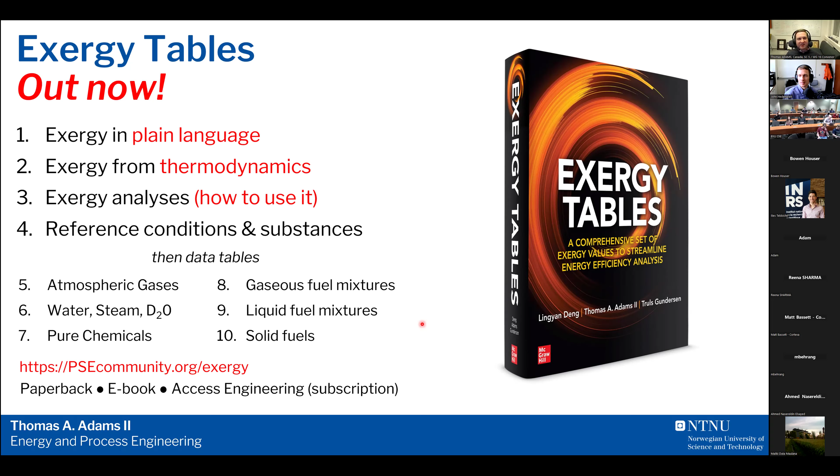And then you're off to the races. Okay, so Exergy in a nutshell, for people that have never heard of it before, the best way I can describe it is it measures both quantity and quality of energy.

It's measured in joules or calories, just like other kinds of energy. But the quantity part is based on the first law of thermodynamics, and the quality part is based on the second law of thermodynamics. Exergy is kind of a marriage of the two.

Here's an example. Let's say I have water in an Olympic-sized swimming pool at 28°C. It has thermomechanical energy in the form of heat capacity, let's say between 28 and 25°C, or I can have 8.3 megawatt hours of electricity. Both of those have 30 gigajoules of energy, so they both have the same amount.

However, the Exergy content of that tepid water is just 0.15 gigajoules, but the Exergy content of electricity is 30 gigajoules, because electricity is basically pure Exergy. So they both have the same energy content, but clearly the quality of electricity is far beyond the quality of tepid water. So what can I do with my electricity?

Well, I can power a Canadian house for 6 months. I can drive an electric car 47,000 kilometers, which is unbelievable but true. Or I can heat up an Olympic-sized swimming pool by 3 degrees. I can do all of those things with 30 gigajoules of Exergy.

But what can I do with 30 gigajoules of energy in an Olympic swimming pool? Well, I can swim in it. So obviously this is more useful, and Exergy is that thermodynamic measure of that.

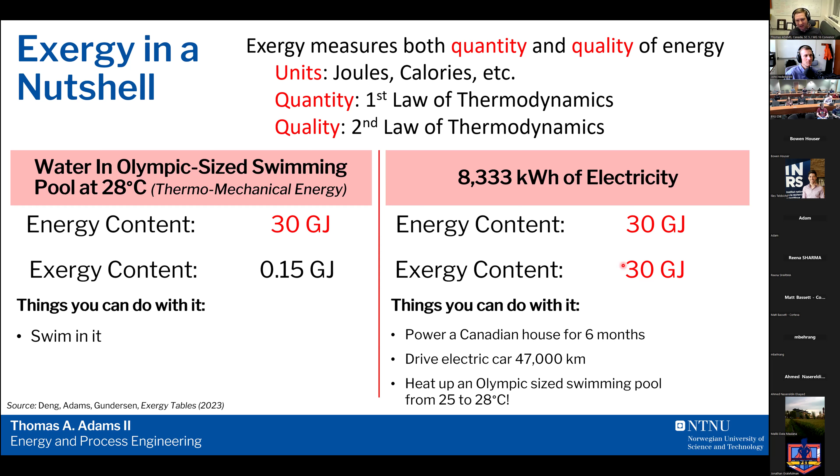We're trying to quantify that now with something that means something to us, and the point is for us as a systems engineer to use it for decision making and to understand and analyze. That's the point. There's actually a bit of an argument in the literature about the taxonomy, like different kinds of Exergy and how you break it down.

I don't want to get into too much detail, but we really focus on heat Exergy. This is very common, everyone kind of starts there. So our book talks about this.

And I want to make very clear, we're talking about Exergy of energy on Earth, because Exergy is relative to the environment. If 30 gigajoules of something is 30 gigajoules wherever it is, that's energy. But if it's Exergy, it depends on how it compares to the environment. So we have to be very specific - we mean the Earth. And we talk about substances and matter.

The two that I'm going to really talk about are thermomechanical Exergy, which comes from thermal energy, pressure-related energy, but it's a little bit more than that - it includes phase. And then the chemical Exergy, which is like the chemical bond energy, the potential there, but also concentration differences from the environment as well - so purity. These are all lumped together in these two forms, thermomechanical and chemical.

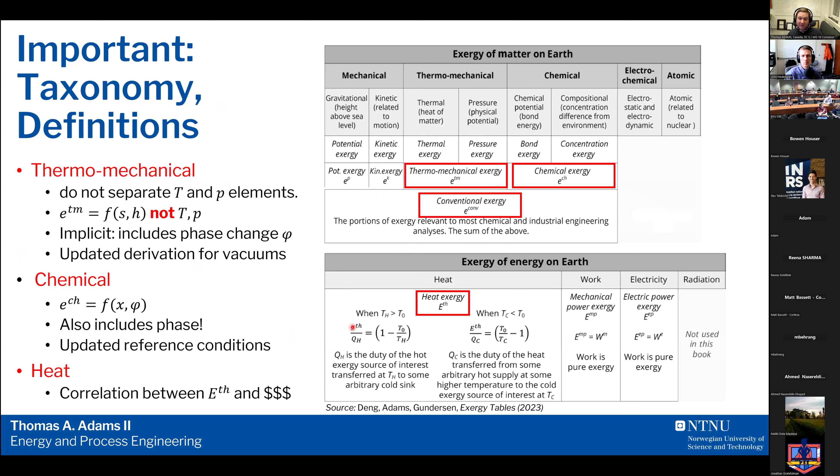We add them together and we get conventional. And we can add things like gravity and motion, but we're not going to talk about that today. So there's a big correlation here between these values of Exergy and monetary value, and we'll talk about that as well. So there's a very, very useful connection there.

Now, the definition of Exergy - this is already argued about. There's different sort of academic spheres based on what definition you work on. It's almost like a family - which family are you in? And this is important. I don't think people talk about the definition enough.

But the best definition I can find, that I think makes the most sense, is that Exergy is the maximum theoretical work obtainable from an overall system consisting of a system and the environment, as the system comes into equilibrium with the environment and then passes to the dead state. We're not going to talk about the dead state, but this is a very common working definition - it basically means I have something, a system, like a chemical I'm really concerned about substances, so like my chemical, and then I have my environment, and I can do work if I can bring my thing into equilibrium with the environment.

Okay, if I can bring it into equilibrium and do work in the process, then I'm producing work. And the max amount of work I can do is what we call the Exergy. I'm going to use TM because I'm going to talk about thermomechanical Exergy mostly today.

So all I did here was rewrite it as an optimization problem because I'm a PSE person, and a lot of people will understand this immediately when I express it this way. This is not common to write down, but it's what we mean in mathematical terms. I should be able to find a process P, that's my decision variable, that brings my system into equilibrium with the environment, and I should be able to do work during that. So whatever process solves the optimization problem, that maximum work is my Exergy. That's another way of looking at it.

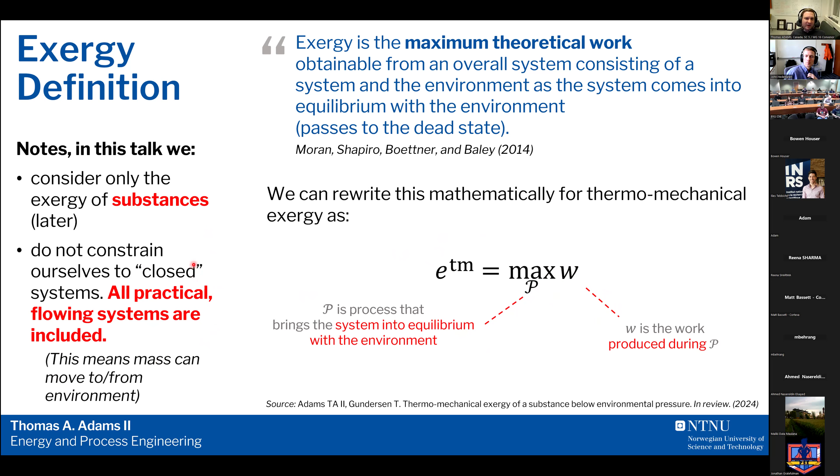Just for the sake of discussion, I'm not going to talk about this, but we're talking about open systems, so they're flowing - practical things chemical engineers care about. You can allow mass to exchange with the environment. That's just a caveat for the nature of the class of equations I'll talk about today. But we can understand this optimization problem, I think, and that's our perspective.

So that process P, you can exploit any difference between that and the environment. I should be able to exploit a temperature difference, a pressure difference, phase differences, concentration differences, chemical form like bonds. I can exploit height, momentum, all sorts of stuff. If it's different than the environment, I should be able to exploit it thermodynamically in some way.

For example, real simple, let's say I have something that's hot. One way I can exploit the heat of that thing is by building a heat engine, like a Carnot engine. Real classic thermodynamic result. I can use that heat if it's above my reference temperature, that's my environmental temperature, T0. And I should be able to use a perfectly reversible engine. I can produce work, and then I reject the remainder of the heat of the engine to my environment.

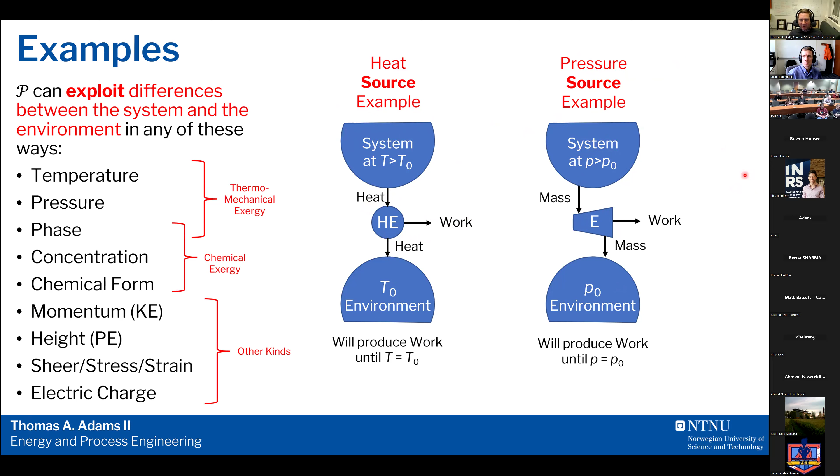I could do this until, if this is closed or something, I could just leave it until it finally cools to the environmental temperature. This is a very normal, simple thermodynamic result. Same thing for pressure: if I have something at high pressure, I can let it go directly into the environment through a turbine, producing work. These are very normal things that we do in engineering. So these both have exergy, and these are different ways I can exploit that energy involved.

But I can do more than that, because if I have a heat sink, if I have something below the reference temperature, below the environmental temperature - my surroundings - I can pull heat from my surroundings into my system and produce work in the process. We do this all the time in LNG regasification. So you have your liquid natural gas go to a terminal, they need to heat it back up, but it's very cold, so they use air or seawater to power that heating, but they can run it through turbines. You can just imagine air going through turbines as it warms up cold LNG.

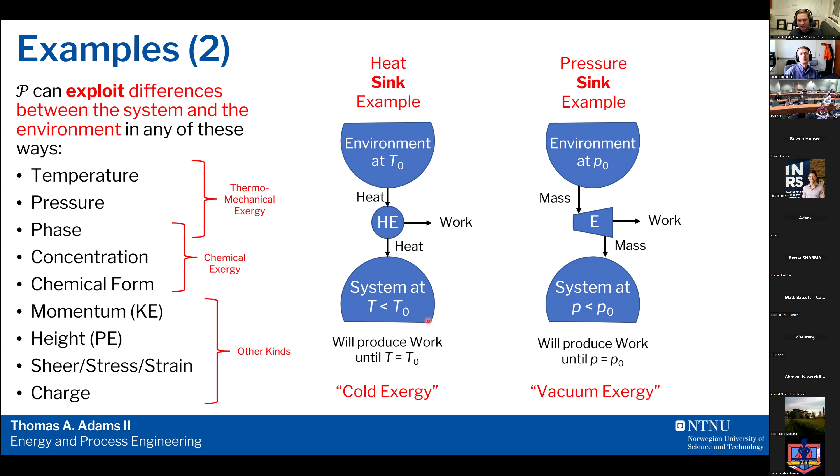So this already happens. This is called cold exergy. I'm going to give credit to my colleague Truls Gundersen, one of the co-authors of the book we did together. Most of his career looked at this in terms of exergy-related systems in LNG. Over his career, he really developed this theory very well.

But I can also have a pressure sink, just like I have a heat sink. I can have a vacuum somewhere, like a low pressure reservoir, and I can allow air to come from the environment, go through a turbine, and enter my vacuum and produce work. None of these things are mystifying - these are all normal things. But I'll talk about later, one of our main new contributions was really in this space. This is really what was unexplored well.

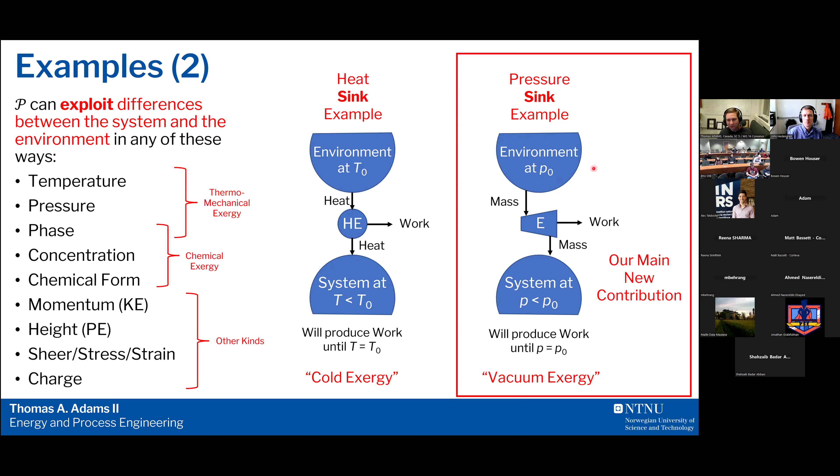So we take a look at heat exergy. You'll find a diagram that looks very similar if you just Google around. Basically, if I have temperature of heat in a generic abstract sense, this is my environmental temperature. You can compute the exergy as I get hotter, and it approaches 1. This is what's called the exergy ratio, the exergy divided by the energy.

So if I'm at 0.9 or 0.8, and I have 1,000 joules of heat, I have 900 joules of exergy of that heat. That's what the 0.9 means. It approaches 1, so infinitely hot temperature is pure exergy.

If I go colder, you can see it increases extremely fast and goes above 1 and approaches infinity. This is very inconvenient, and people don't understand this. If you look, so many people just conveniently stop the temperature chart there so they don't have to think about it. There's a lot of publications that just leave that part out.

What it really means is the number you're dividing by is the wrong number. The actual source of energy isn't that, it's from the environment here. So if you divide by that number, which is kind of invisible, it approaches 1, and 1 is the exergy ratio at absolute zero. So if you have a reservoir of infinitely cold stuff, every bit of energy you can produce is work.

So you have real truth, these limits make thermodynamic sense. But this is a very simple thermodynamic result, and it gets a lot harder when you deal with real substances.

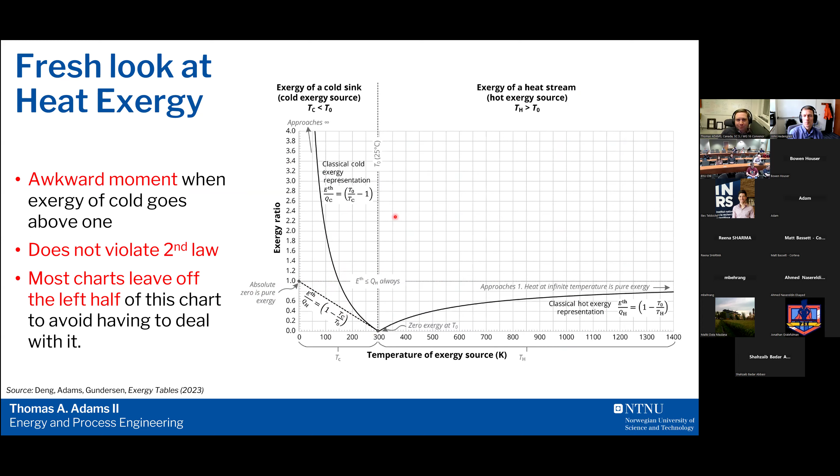But we can apply this and see how it really works in practice with real systems and real value. These are utility costs in 2020 US dollars per gigajoule of service, as a function of the temperature of that utility. If I have low pressure steam at roughly 120 Celsius, it's roughly $4 per gigajoule of steam that I purchase. These numbers are out of Warren Seider's textbook.

They're kind of like medians of his ranges, but they really come from industrial survey and experiential data, and I'm just plotting his data. You can see that it comes to zero at around 78 Celsius-ish - it's rough. But what that really means is that the environment of your chemical plant, the surrounding temperature, really isn't 25, it's really 78.

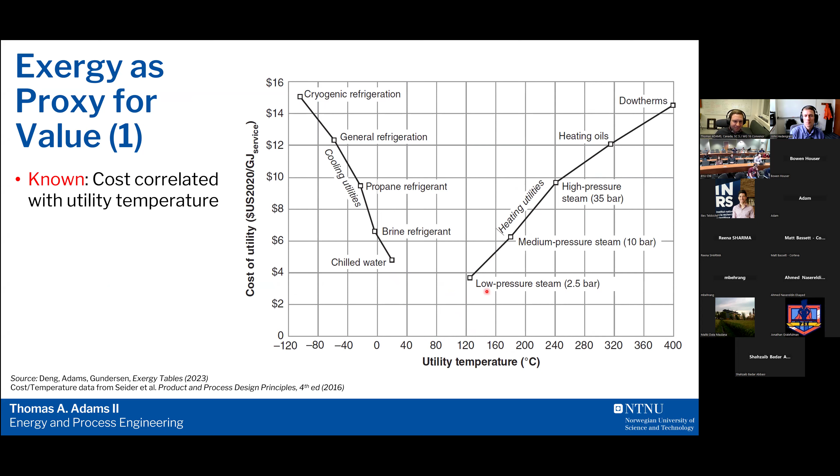It means that waste energy - you have enough waste heat floating around the average chemical plant that it's not worth anything, you can't use it for anything valuable. It's kind of like a no-go zone. So that can become our reference condition for computing exergy of utilities, because that's the true value from the measured data, like what we're seeing.

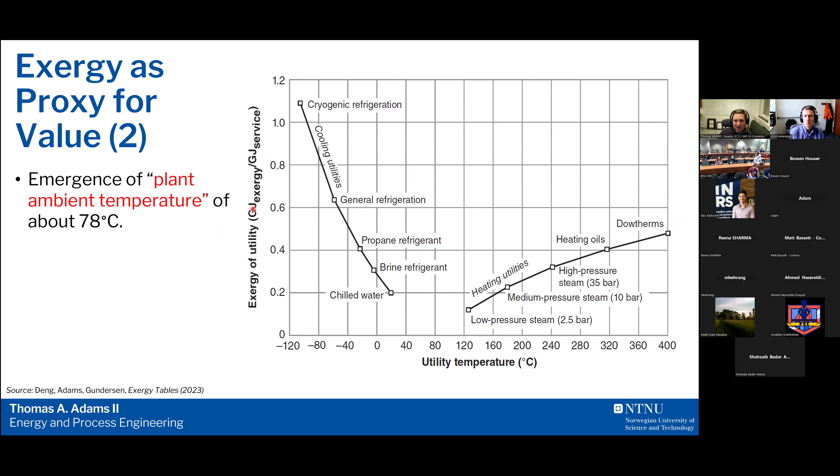All we have to do is compute the exergy of that utility, the same ones as a function of temperature, and you can immediately see it follows that heat chart I showed before. It just follows it directly, and exergy gets very big as I go into the refrigeration space. So I can take that exergy of the utility and plot it again against the cost from the previous slide, and I get this.

Here's my exergy of my utility, and here's my cost. What we see is a dead linear correlation between the actual survey cost of a utility on average and its thermodynamic exergy - 0.998. It's basically $30 a gigajoule of exergy, straight up for heat.

Cooling is a different relationship, but if I use that plant ambient reference, I have this direct, immediately correlated value that goes right down to zero, and it's absolutely remarkable. It's a wonderful natural result that shows how exergy and value are so linked that money itself is related to exergy in this thermodynamic sense. That's a remarkable piece of information, and it's so useful.

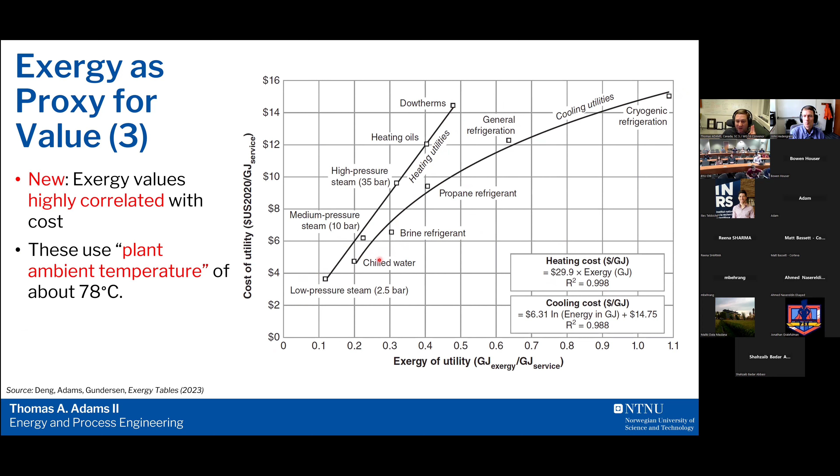So we can use that in PSE for all sorts of stuff. That's really cool.

In general, we know this anyway as chemical engineers - things that have high exergy can do work. If I can use them to release energy and do work, they result in low value streams. If I have a hot compressed gas, I can expand it, produce work, and then I have just a boring, weak atmospheric gas I can't do anything with. If I have something really hot, I can use a heat engine to make work.

If I have an environmental stream, I can't do anything with environmental temperature. I can blend things to make interesting properties, I can release a chemical potential, I can burn stuff. And all of these I can do work with.

But to go backward, to go from low value to high exergy and high value, I need to consume a massive amount of work. To go away from ambient, I need to compress or pump. To go to a temperature away from ambient, I need heating and utilities, either direction, up or down. Separations is a massively expensive thing.

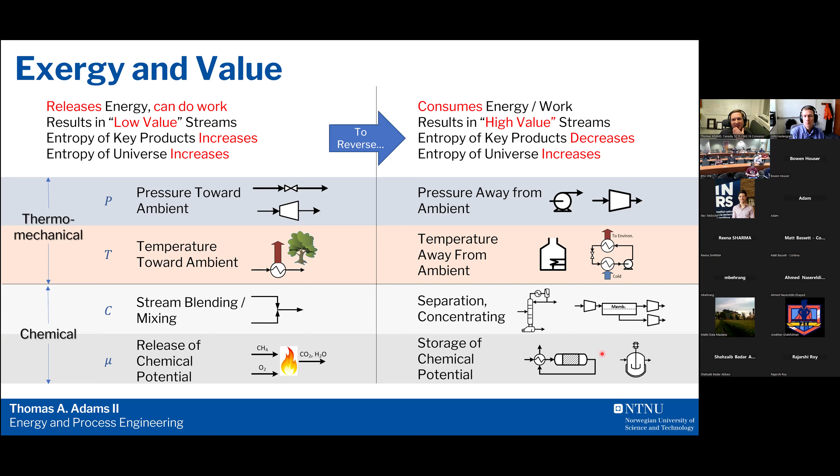This is a huge part of our industry, just how to do that. And creating chemicals with high energy is also very difficult. Really endothermic reactions and bonds require a lot of work and energy to make that happen. But you can see it explicitly, and with chemical exergy, it's hard to appreciate just how high exergy certain chemicals are in fuels. So methane, natural gas, I can combust it and make heat and do all sorts of work with it. But then I get low value stuff. How do I get from low value stuff back into methane?

I could electrolyze water from the environment, I could use direct air capture of air to get CO2, I could electrolyze that, so I can get hydrogen, I get CO. I could do methane synthesis, then separate out my chemicals and get methane. So this is a lot of work. It's something people actually think about doing now in a hydrogen economy. But that's an incredible amount of work to go from the atmosphere to my substance.

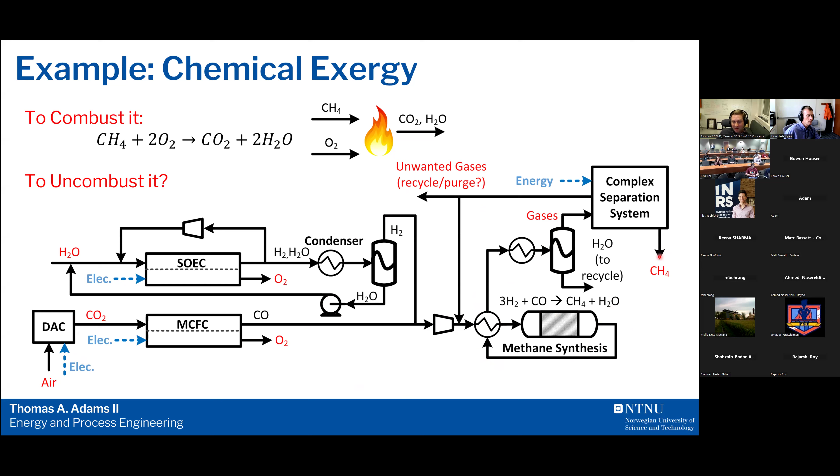But it goes both ways. So I'm going to talk for a minute about the classical thermomechanical exergy equation, because I think this is the most useful form that people can use quite directly in their own work. I think the hardest part is coming up with the values of H and S, but beyond that, the exergy of a substance, when you talk about just temperature, pressure, phase, is very simple.

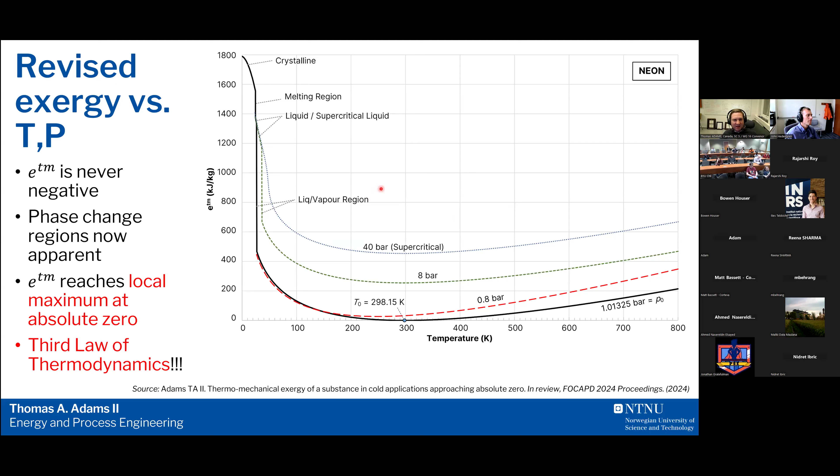But now you can see the effect of the different variables in a plot, which more people like to see. So I'm going to give you some examples now of where we can actually use this. If you get a good sense for Exergy, the book has a bunch of examples. I'm going to take you through a couple, just really short, just to give you a sense.

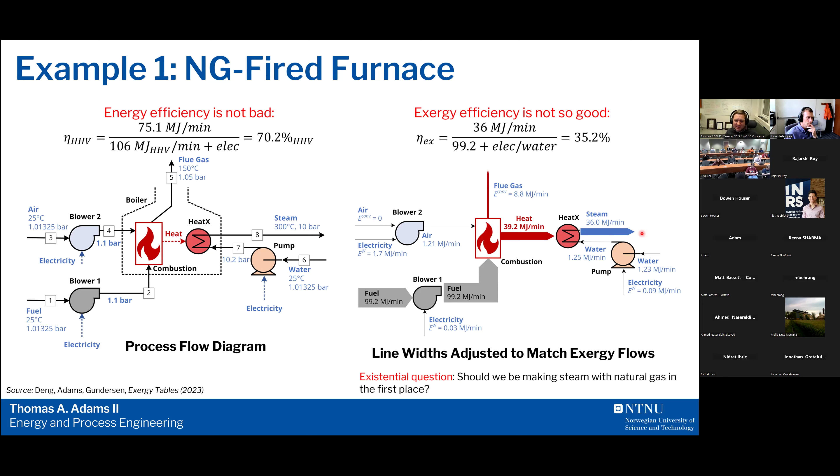Okay, and if we do this, why is that a good idea? You can trace this in a Sankey diagram, it's basically the same thing. So my energy flow, I'm getting basically 70 some odd percent of my joules out from what I put in the fuel. I'm losing a bunch out the flue, of course.

But in terms of exergy, I come in with 99. I'm only getting 36 out of steam at the end. All of this is absolutely lost. Never to be regained.

This flue gas here, I could, for example, make a heat exchanger to capture the exergy off that flue gas, but it's only 8.8 megajoules a minute I could ever possibly get. No matter what I do, this part is completely lost. I can't even capture that.

So this tells me, okay, if I were to make improvements, I already know I'm losing energy out of the flue gas, but it's really low quality energy. So maybe I don't need to build a heat exchanger, maybe it's not worth it. Or if I do, this is a nice thermodynamic bound. I don't know really, it's not an obvious solution how I want to do that. In reality, I probably would.

But we can see from the exergy analysis that it really puts things in perspective. This lost exergy is really telling us we're using high value stuff for low value product. You're just losing it, it's gone, creating entropy you can't get back.

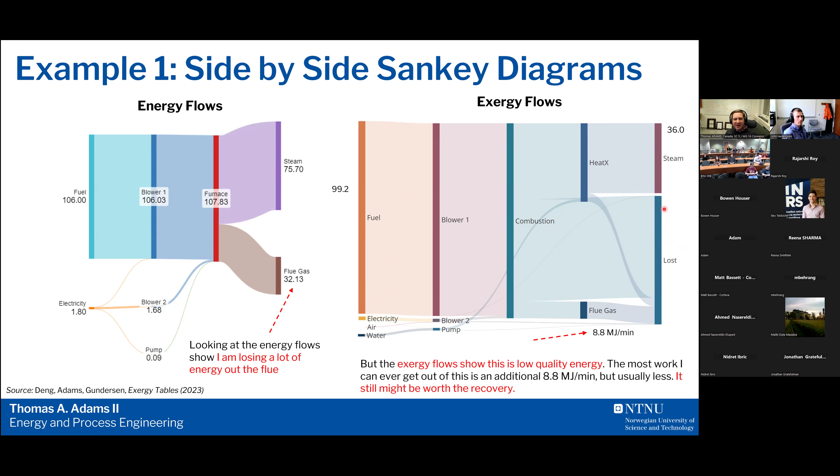So in order to calculate these numbers, in the book we have tables of data for the really big stuff and charts for everything else. So air and water, we have huge tables, think of like steam tables. Steam tables are boring, but they're super useful. Being able to just look up the exergy of your most common things, super fast, super nice.

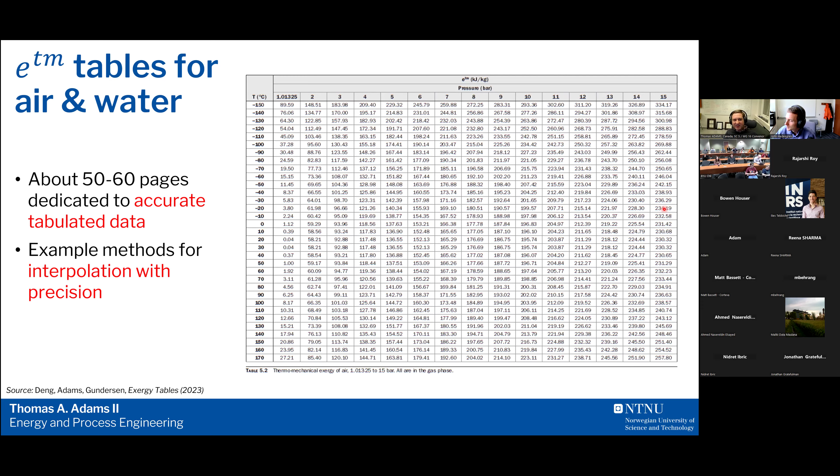But we also have chemical exergies, which are really hard to compute because you have concentration impacts, you have chemical bond impacts, and it matters against reference conditions, like how much bromine do you have in the ocean. That kind of stuff is really tough for the normal person to deal with. So we do all that work, and then you can just look up the exergy number for chemical exergy, and it's really fantastic.

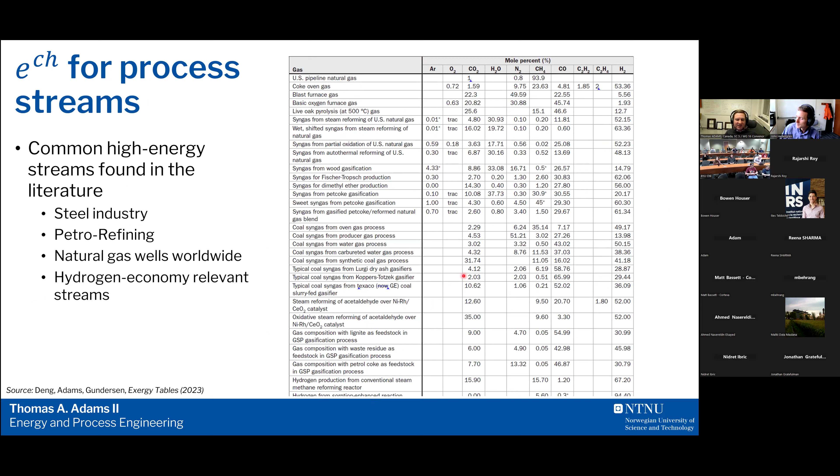We have it for thousands of chemicals. We have it for lots of common process streams that we get from industrial collaborations, concentrations, and things like that. So it's a really nice thing to take a look and just pull data so you can get right to the analysis.

Another good example is direct air capture. This is a hot topic in the environmental world. Should we spend very large amounts of, hopefully, CO2-free electricity to pull CO2 from the air and make it basically pure CO2 that we're going to sequester or do something with? We can still use exergy for very good thermodynamic bounds for this process.

So we said exergy is the maximum work you can get out of something, right? Thermodynamically speaking, that can only happen if it's a reversible process to get that work out. Flip that on its head, because it's reversible, exergy is also the minimum amount of work it takes to get that thing from the environment.

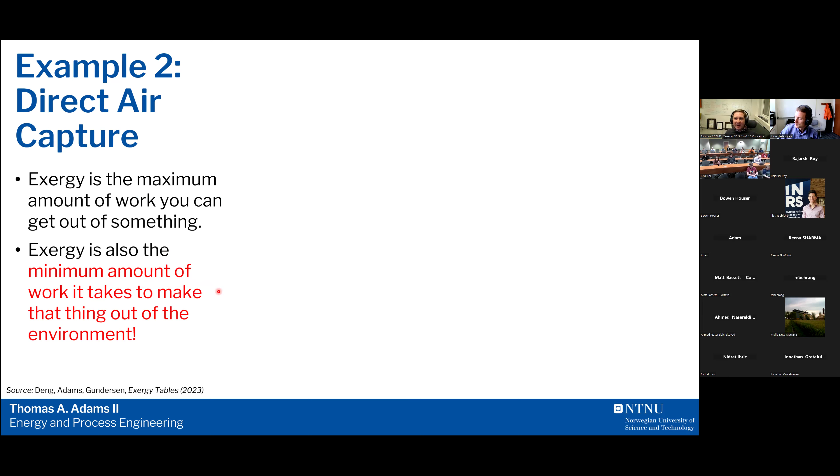So if I have CO2 and I know its exergy, its chemical exergy, I can just look it up. There it is on my table, it's about 20 kilojoules per mole. So that chemical exergy, that's not chemical bond energy, that's really concentration differences with the environment. I should be able to exploit this somehow to produce work.

But it's also the minimum, right? It's the minimum amount I have to spend to take CO2 from the environment and bring it up to pure CO2 at my environmental conditions, 25 C and 1 atmosphere. That doesn't include thermomechanical changes, that's just to deconcentrate it, to concentrate it, to undo the mixing of release.

It's a thermodynamic bound, like you can't spend less than this to do the job, thermodynamically impossible. So what a fantastic bound for us to evaluate direct air capture, just through the lookup table. So if I go and do this, in the book we go over some existing examples, mostly proposed design specs that we think we can achieve.

So they're very generous. We're going to use an air source heat pump for electricity, like all the things that would make it look good. We can get about 13% Exergy efficient to get CO2 out of the air and into uncompressed, room temperature form at pure conditions.

Okay, so a couple of things. 13% is a lot better than I personally thought it would be—I thought we'd be at 1%. 13% says okay, we could be 6 times better in theory, but we'll never get there. This tells you it's not the worst, and we can get better thermodynamically. We've got a lot of room to grow. But what a fantastic bound we can use to evaluate the entire technology as a whole.

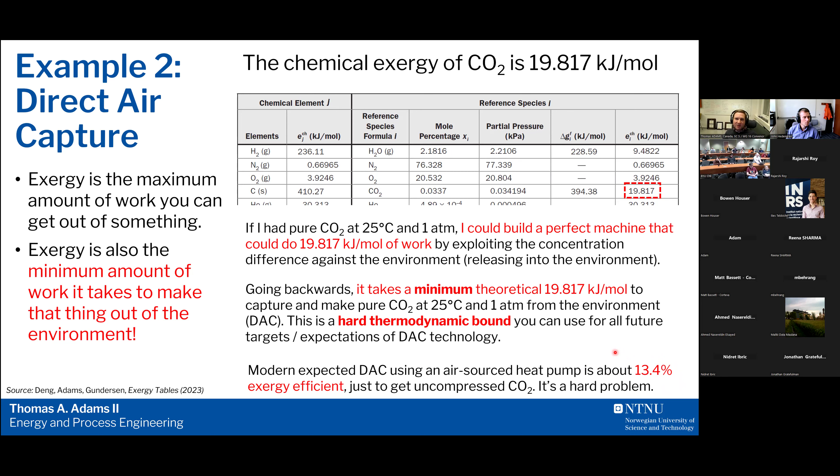Super useful. Now I'm going to use another example. Let's say I have that CO2 and I want to compress it and put it in a pipeline to sequester. That's something you could do—that's one of the reasons you pull it out of the air and stick it in the ground, for example.

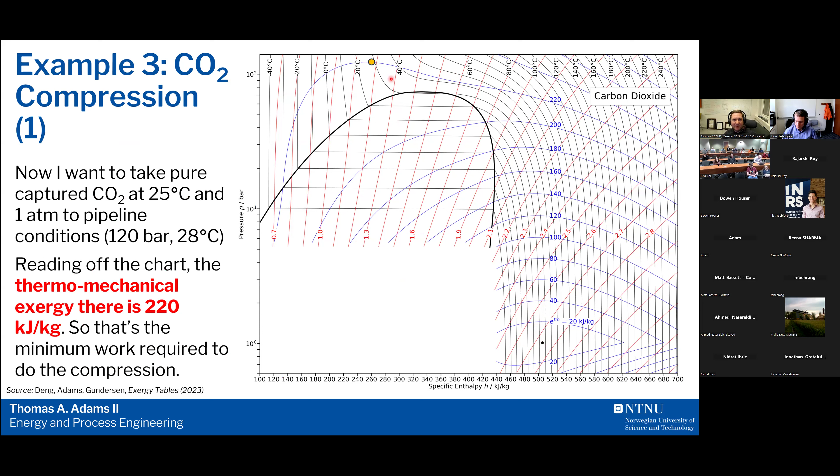So I'm going to start with CO2 at 25°C and 1 atmosphere, just got from my DAC, and there it is. It has zero Exergy thermomechanically—it has chemical Exergy now, but we're doing thermomechanical changes. I want to get it up here, to pipeline conditions: 120 bar, just a bit above atmospheric temperature. That's about there, right on the 220 line, kilojoules per kilogram. That's the minimum work I have to do to get it there in a perfect, lossless compression system—minimum 220, can never go lower. What a fantastic bound for us.

A real process looks like this: multi-stage compressors with intermediate cooling, flashing out water if you have any in there, depending on your setup—this is for a different example, but basically the same thing. I want to get into sequestration-ready conditions. In the book we go through it: I need about 411 kilojoules per kilogram to run all these compressors, and these are real compressors, not perfectly efficient—sort of real systems.

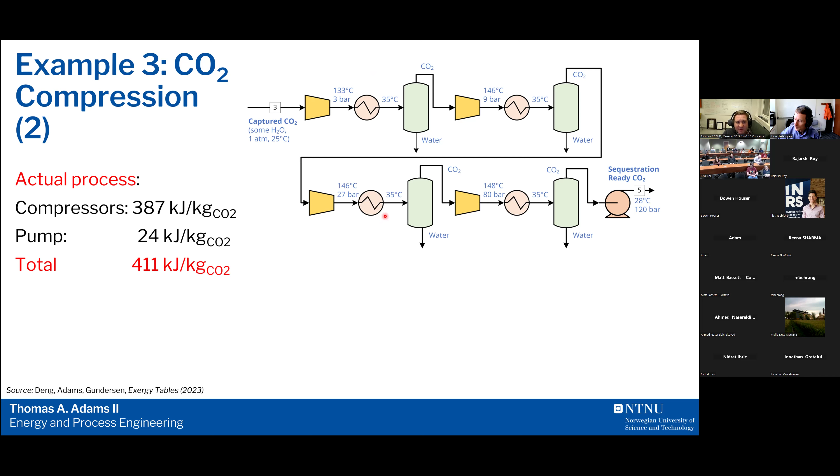And that's not so terrible—about 53% Exergy efficient. So there's some room for improvement, but this is really expensive, and yeah, you can improve things here, but in reality, fighting against entropy like this at 50%, not so bad. There's probably not a lot more we can do on this side.

Last example, and this is exciting because it's not my work—it's Dr. Ibrić's work. He's a professor in Bosnia who came here to work with us on Exergy. What he does is heat-integrated network synthesis problems—superstructure optimization, where you design the best water and energy network for heat exchange and mass exchange. One of the things he did while working with us was start using Exergy as a proxy for cost.

We already showed you how it could reflect utility differences, but what he managed to do is come up with a way to find an Exergy value that corresponds with capital. His innovation is really to use the Exergy loss due to friction, and he showed it correlates with network complexity in a general sense—stream matches, sizes of exchangers, that kind of thing. It's a really good proxy for capital.

He showed two things. One, the superstructure problem where you're minimizing Exergy loss gives almost the exact same solution as minimizing cost—annualized cost with capital and operating together. The difference is the Exergy part relaxes the problem from an MINLP to an NLP. If you know what that means, it's way easier to solve, and the answer is right there. This is fantastic—it's in press now, but it's a wonderful application he did. We're really excited about what he's been able to do, and he keeps working in this space.

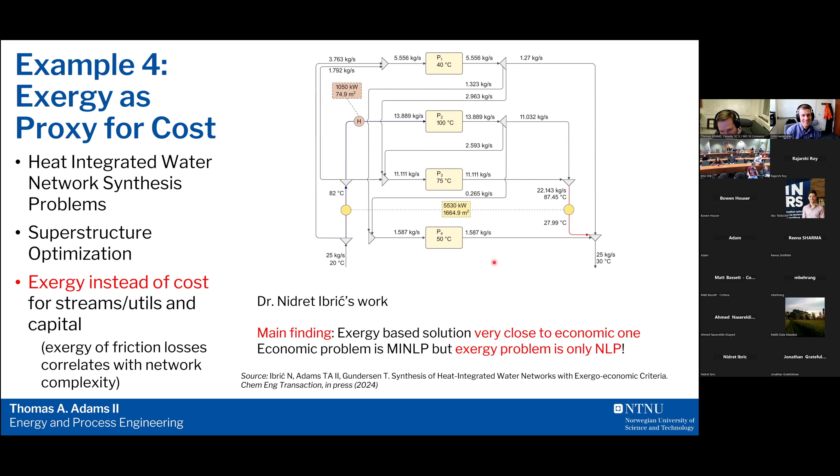I think that's about what I need. So, I'm going to break down a year's worth of research that I'm putting my career at risk providing to you. So in 4 minutes, hopefully I do justice, okay?

So the main thing is really examining, as I mentioned before, that thermomechanical Exergy below atmospheric pressure. I tried to show you that it was negative. If you do the calculation, it's absolutely negative. Like you type that in the equation, absolutely. That part's not in question, if I just blindly type in my enthalpies and entropies. So basically, this is what we had to challenge, the status quo on that equation. The truth is that so few people have looked at this problem that it's easy to understand why it made it through.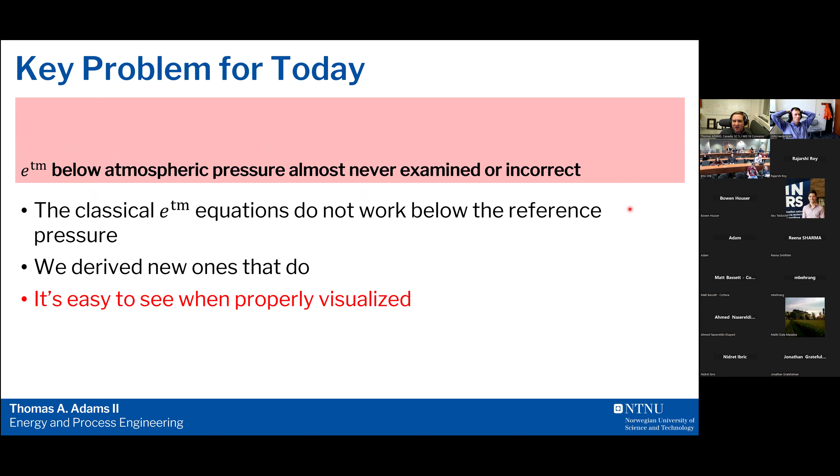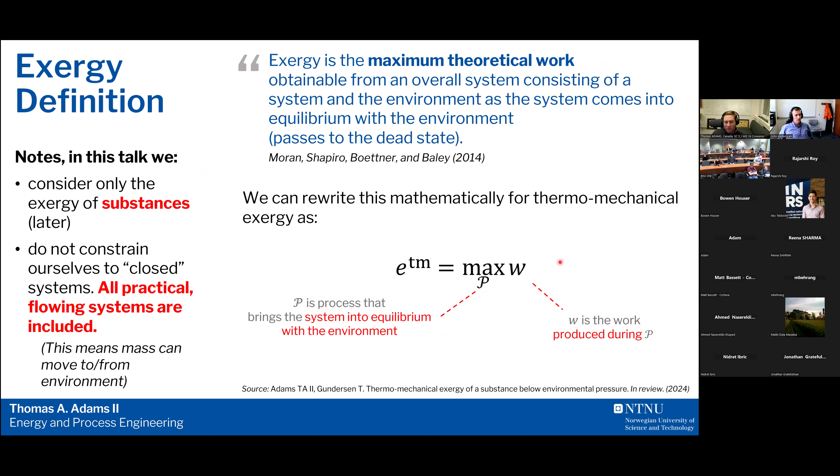So I'm going to go right back to my definition. It's the maximum theoretical work you can do. And I have my optimization problem. I just want to bring that right back up, and I'm going to find the process that gives me the maximum work. I'm going to also repeat the slide of this model, and this is the equation I have again. One more time, to visualize everything.

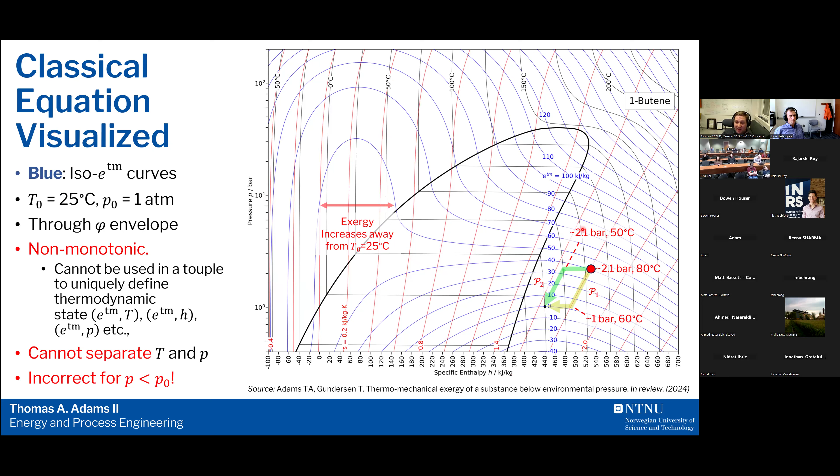So this is what caused me significant pause. But this has been discussed, I'm not the first person to bring this up, that's for sure. So my argument is negative Exergy cannot be the solution to the optimization problem. You can't have negative. And it's easy because I can provide a lower bound through a counterexample. And if you're an optimization PSE person, this makes total sense to you. I can always find a process that equilibrates my system at zero work.

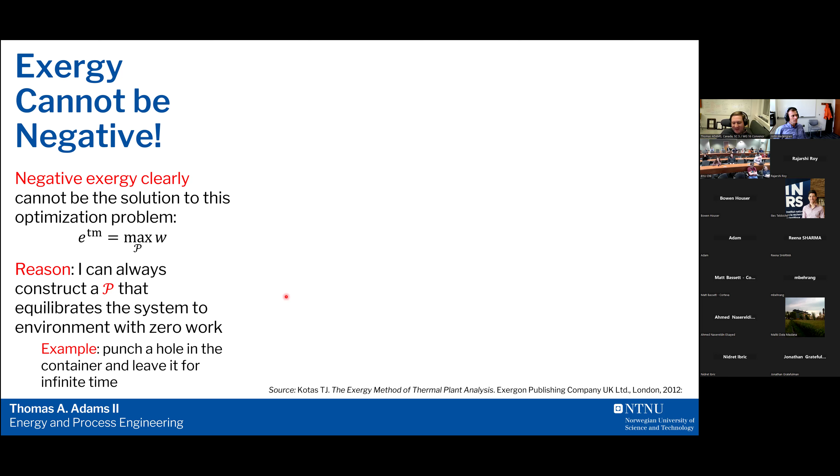So if I have my vacuum, my thing's sitting in a glass jar, my process is I'm going to punch a hole in it and just let it sit there. Given infinite time, that thing's going to fill with the environment air, right? It equilibrates and it does no work. So zero is at least one solution to that problem, but it's definitely not the max, it's definitely not the min. It's more than negative. So from the optimization perspective, I just don't see how that could ever be the case from the definition. So there's one book, Kotas, and there's a whole community of people that have this position.

And so Kotas goes to explain this, to prove it. Why is it negative? And he said, okay, I'm going to postulate this process. It's completely reversible. I'm going to use the fact that there's some temperature difference in the environment to drive a heat engine. It's going to make work for me. I agree there, it's off temperature. And then I'm going to use that work to drive a compressor, which is going to generate that vacuum for me upstream. So that's how you would generate a vacuum.

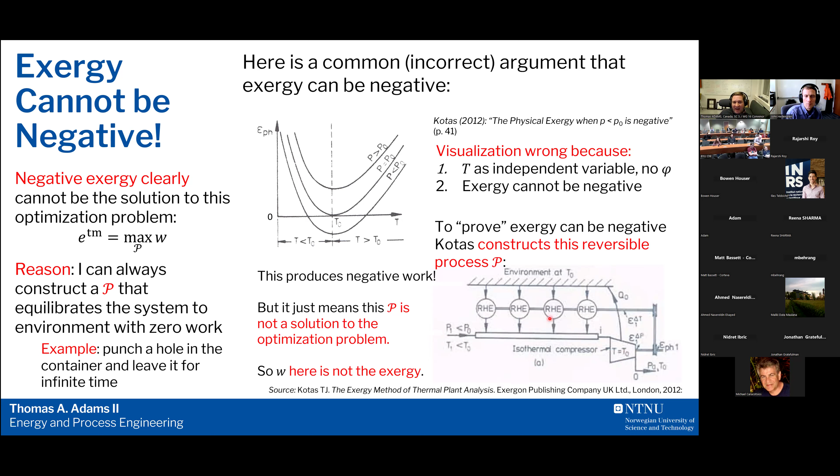If you do the math, you get a negative number because you have more work in the compressor than in your generation here. The conclusion he makes is therefore, because it produces negative work, exergy is negative. But I say no, it just means your process isn't the solution to the optimization problem. Yes, you postulated a P, but it's not the exergy.

So what happened? Basically, if you go back to this original model that everybody uses, it's the start of every single exergy textbook. There's something really important missing: there's no ability in this generic form for mass to leave the environment and join with the substance to go into my magic box. Because of that, we've arbitrarily constrained our optimization problem. In an optimization context, it makes total sense, we've constrained away the solutions that would solve it in a normal situation. If we eliminate that constraint, we should be able to find the new solution. This is not general enough below atmospheric pressure.

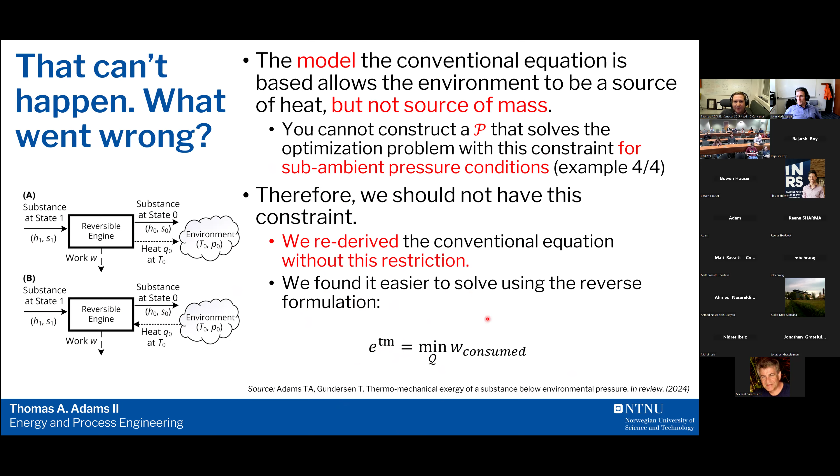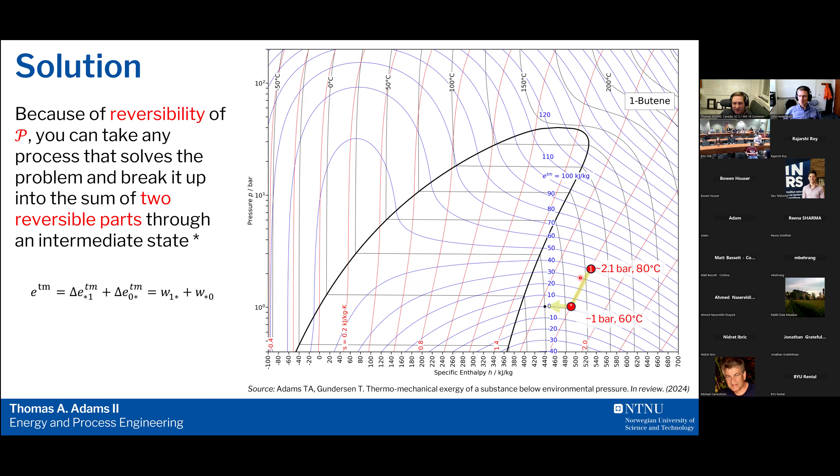So we re-derived everything, and we found it easier to flip the problem. The exergy is the minimum work it takes to go from my reference state to the environment. It's a thermodynamically equivalent problem. Going back to this example, I break it up into a state star. I know the work it takes to go from here to here, which is a compressor or expander, reversible, and I know this is a reversible heat pump. I can also go backward, it doesn't matter, it's the same. I can do either one, and they all arrive at the same equation.

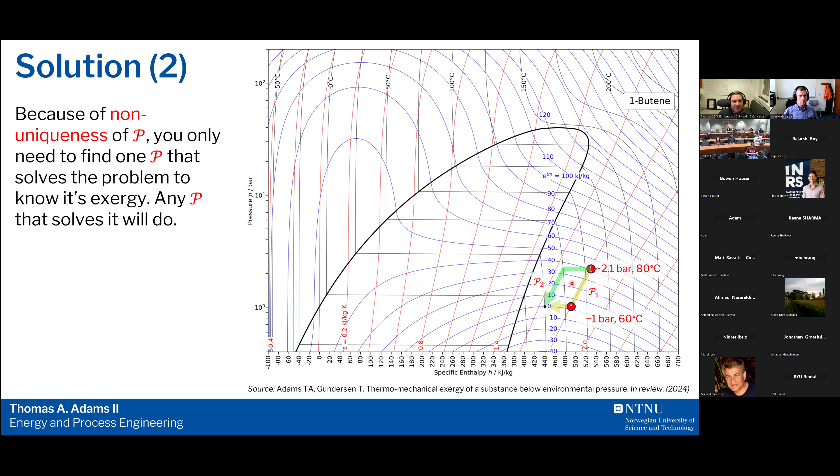So the optimization route, if I postulate these P's, they actually verify the classical result. Provably, the classical result is the optimal solution with pressures at and above reference pressure, even though it's non-unique. I can also pose the Q that goes the reverse direction, and I get the same thing. But if I go down, what I need is basically a heat pump, and then I need to do isentropic expansion, doing work to create this vacuum against boundary conditions.

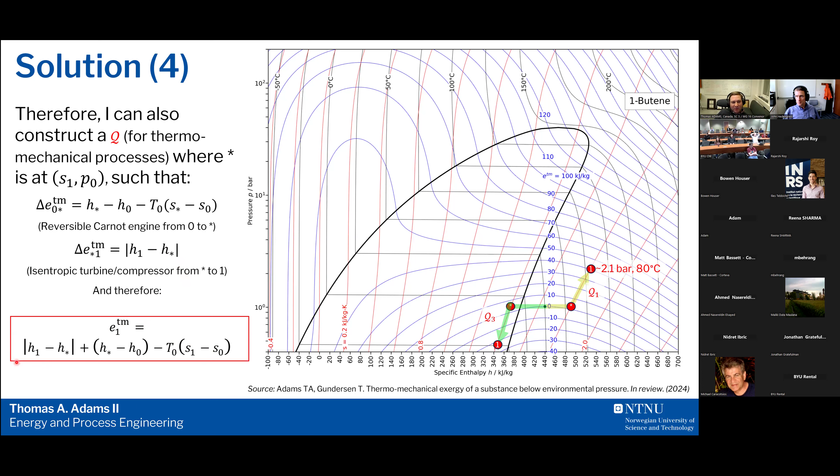That's also just the entropy difference, enthalpy difference here. So if I just take these two steps, and any process will do since there's non-unique solutions, I just have my first step, which is the classical equation everyone agrees with, plus this enthalpy difference, which is also very classic thermodynamics, a reversible change in pressure isentropically. We add them together and get our new equation. It looks weird because it's an absolute value, but that's just to reflect that I need different technologies to go in both directions. This reduces to the classical equation above atmospheric, and below it, it's a little different.

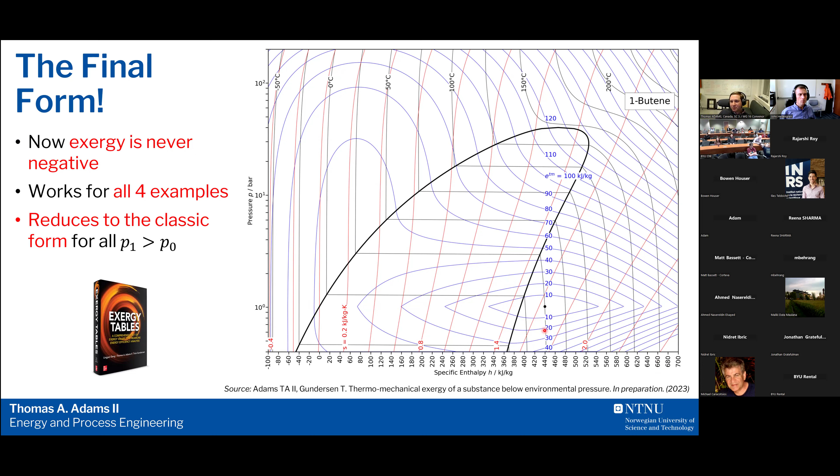If I replot it now, I have something that makes total sense. I have my dot, my zero, and everything gets bigger away from it in this fashion. It's not smooth here with reference to sensitivities, but that's because I'm switching machines. It makes total sense, we saw that same non-smoothness in the heat curve, it goes down and then sharply goes up in a totally different direction. So that's already built into the system, we already have a system switch. That's the fundamental challenge: we need to use a different equation below this. Everybody's fine with whatever you've been doing above it, but if you're exploring this new space, we need something different. So that's basically it.